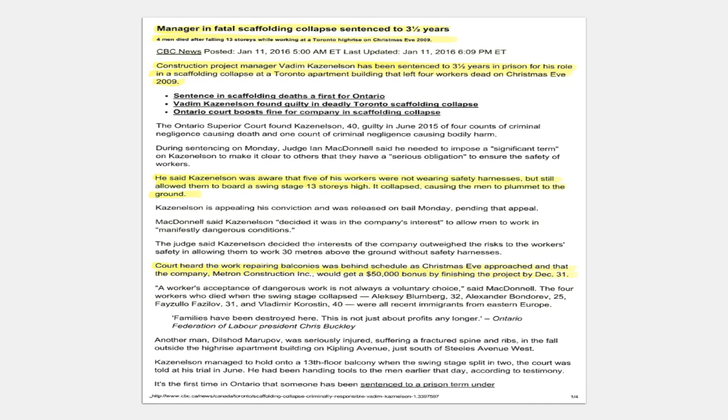OH&S ticketable provisions: the government searched the OH&S code to identify simple, observable, and clearly prescriptive violations that could be converted into ticketable offenses. It came up with 66 of them, to be charged against both employers and workers. Tickets impose an immediate $100 to $500 stipulated penalty. Worker tickets range from $100 to $200, while employer fines range from $300 to $500. In many cases, both the employer and worker can be ticketed for essentially the same offense. If a ticket is issued only to a worker, the officer will give a contact report to the employer.

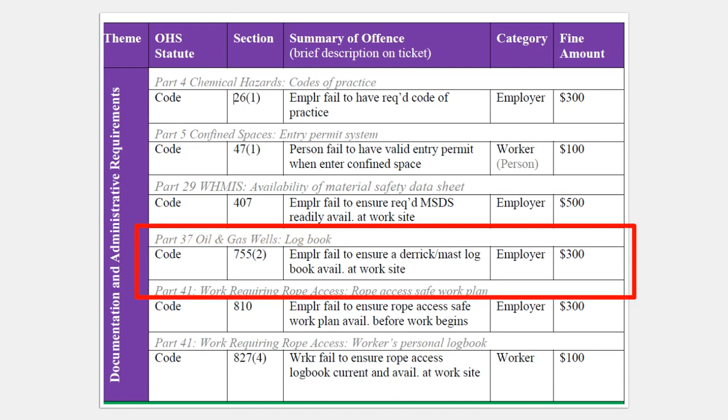Employers failing to ensure rope access safe work plan is available before work begins will incur a $300 fine. Workers failing to ensure rope access logbook is current and available at the worksite will incur a $100 fine. Employers failing to ensure workers are using or wearing the required equipment will incur a $500 fine. Employers failing to ensure workers exposed to traffic are wearing the required visible clothing will incur a $500 fine. Workers failing to wear the required visible clothing when exposed to traffic will incur a $200 fine.

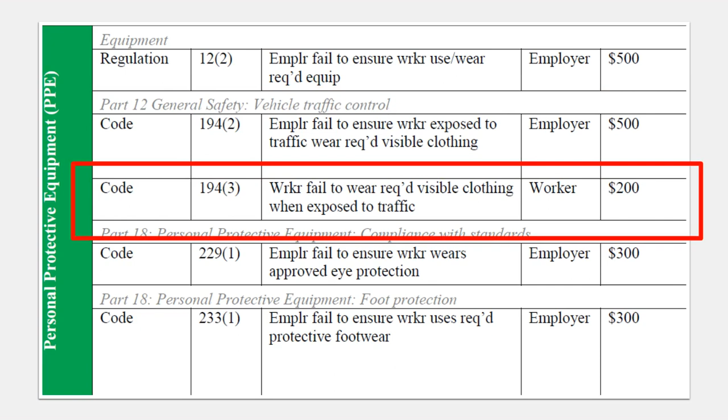Employers failing to ensure workers are wearing approved eye protection will incur a $300 fine. And employers failing to ensure workers are using the required protective footwear will incur a $300 fine.

Navigating the OH&S Codebook. There are 4 parts to the OH&S Codebook. Due diligence: this part outlines the legal duties under Alberta's OH&S Act, regulations, and code that are imposed on employers, workers, contractors, prime contractors, and suppliers. Act: this part outlines the obligations of employers, workers, prime contractors, and the Government Safety Council, for example, to have written health and safety policies, conduct regular inspections of the worksite, etc. This part also outlines the role of OH&S officers. Regulation.

This part outlines specific requirements for critical documents to be available, such as the OH&S codebook. This part discusses legal requirements of the employer for items such as maintaining equipment, providing safety training, ensuring workers are competent, etc. It also outlines the administrative penalties. Code: this part is the largest section of the legislation that identifies, in detail, the legislative requirements based on a specific topic, known as a part. For example, Part 2 Hazard Assessment, Elimination, and Control, or Part 32 Excavating and Tunneling.

I went to work for a natural gas company, in the pipeline department, and I really enjoyed that work. I enjoyed it because it was almost always outside, and there was a wide variety of things to do. One day I could be digging a ditch with a shovel, the next day pulling charts at a well, the next day welding. I liked that variety. September 20th, 1991.

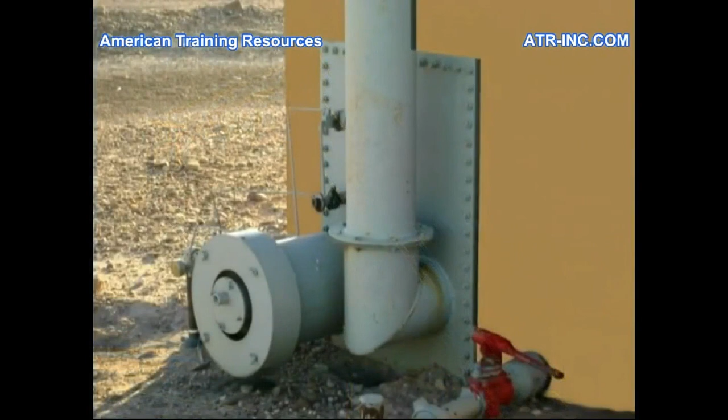I left with a senior welder Friday morning. We drove to the first location and finished our welding in that station right at break time, right at 10 o'clock in the morning. We were taking a break, and our company pumper came in. He said he had a well just right outside the location where we were. That well had 2 drip tanks on it. Both of those tanks had a pinhole leak in a weld that went around the fire tube. Could we put that on our schedule to fix sometime?

The welder I was working with that day, his name is Tracy. At that point, Tracy had worked with the company for 30 years. Tracy said, we'll just fix it today and not have to worry about putting it on a schedule. The pumper said, okay, I'm going to get hold of my supervisor and let him know what's going on. Because of a conflict between Tracy and that supervisor years earlier, and Tracy hadn't forgotten it, he said, no, you don't need to get hold of your supervisor. I'm going to do it today while I'm here, and we'll surprise him. We finished break. There was some other discussion that went on.

We drove over to the well just right outside the station where we were, and I got the gas monitor out and checked the atmosphere around where we were going to be welding, and it was safe. And I asked Tracy, what's going to keep a spark from getting inside one of those drip tanks? He said the pumper had told him what the liquid level was. It was several feet high. We're going to be welding 12 to 18 inches off the ground. If he happened to burn through the tank while he was welding, the liquid would snuff the fire out immediately. If he happened to go into the fire tube, it's made to have fire anyway, so we'll be okay.

What we didn't do was go to the truck, get our tape out, walk up the catwalk, open the hatch, and gauge the tanks to find out for sure what the liquid level was. We assumed that the information we'd been given was correct. It was not.

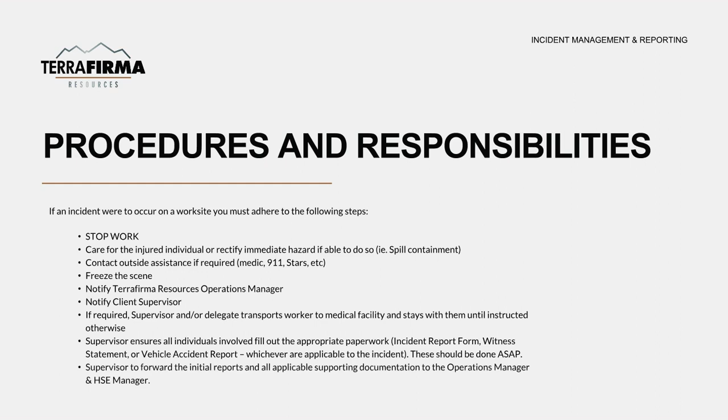OH&S reportable incidents. The incidents that are reportable to OH&S only by senior management are as follows: an injury that results in death; an injury or accident that results in a worker being in a hospital for more than 2 days; an unplanned or uncontrolled explosion, fire, or flood that causes a serious injury or that has the potential of causing serious injury.

The collapse or upset of a crane, derrick, or hoist, or the collapse or failure of any component of a building or structure necessary for the structural integrity of the building or structure. Corrective actions and preventable measures. The reason we investigate all incidents is to prevent future incidents.

The investigation process determines all of the indirect and direct causes of the incident, which allows for recommendations of corrective actions. Corrective actions must be completed in a reasonable time frame and must be communicated to all personnel.

In the next few slides, we will review an investigation example for a high-potential line strike incident at a worksite. The summary of events are as follows.

On March 23, 2015, a subcontracted HDD company was performing a 116-meter bore under 6 hotlines, a power line, and an access road. The crew successfully crossed the first hotline at a planned depth of 3.5 meters. As the drill bit approached the second set of hotlines, the depths were verified again at 3.5 meters. As the drill proceeded forward, the crew heard and smelled escaping gas.

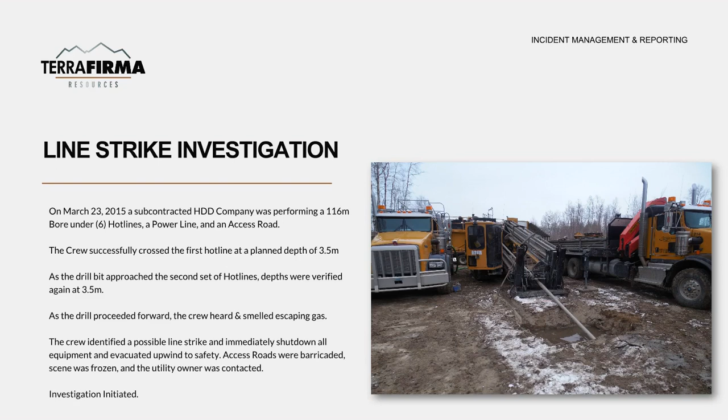Investigation initiated. Terra Firma Safety and Management arrived at the location to begin investigation. Statements were taken from all present at the time of the incident. The site was inspected, pictures were taken, sketches were drawn, and measurements were taken.

Documentation was reviewed and interviews of supervisors were performed. Post-incident drug and alcohol testing was performed.

Let's review the sequence of events. On March 13, Hydrovac daylighted the hotlines on bore number 36. On March 23, the HDD contractor met with the line representative and verified the depths of lines. The HDD contractor drafted the planned bore profile and reviewed it with the line representative.

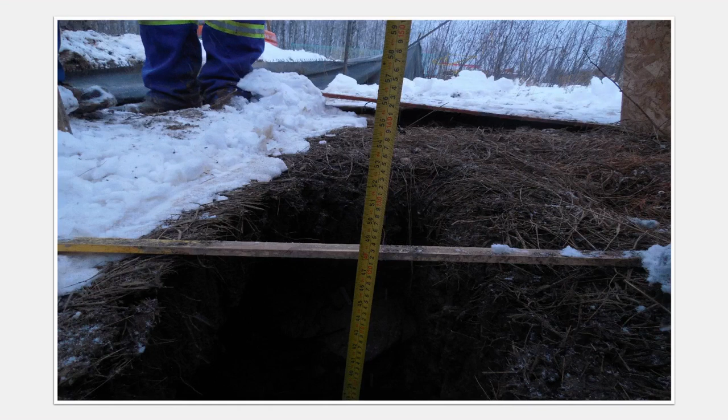Drilling commenced. The drill crossed under the first hotline and depths were verified. The drill approached the second set of hotlines and the depths were verified. The drill proceeded forward and the line was struck.

So what happened? Prior to beginning the drill, site hole number 1 was opened up using a hydrovac to expose the hotline. At a depth of 1.22 meters, the truck hit hard rock and workers were unable to obtain a visual on the hotline. They tried again, exposing site hole number 2 to 1.25 meters. Again, they hit hard rock and were unable to obtain a visual.

They tried a third time, opening up site hole number 3. With this site hole, they were able to fully expose both the 8-inch and 3-inch hotlines at a depth of 1.8 meters. The only difference was they had moved upstream on the hotlines to get away from the hard rock which was blocking their visual.

The problem, however, was that this site hole was not on the bore path. With the rock shelf hindering their ability to verify the exact depth of the line along the bore path, the workers inferred that the line was at the approximate depth of 1.8 meters found at site hole number 3.

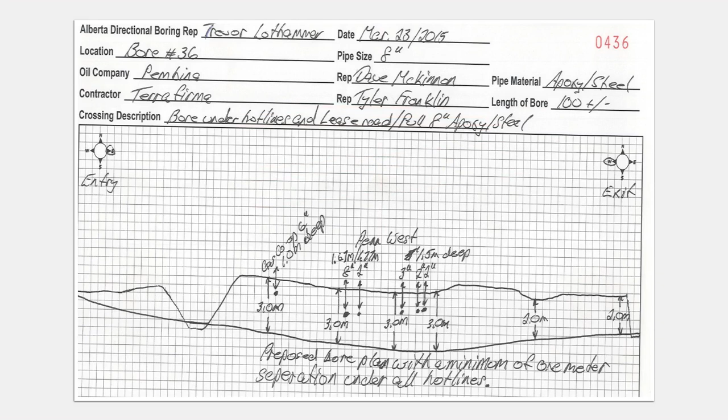They believed that 3 meters in depth for drilling would be safe. The line being drilled under was old, and workers didn't anticipate that a line would make such a dive in depth in such a short distance. But that is exactly what it did. Increasing from 1.8 meters in depth to 3 meters in depth in only 8 meters, the line was struck by the HDD drill.

Contributing causes were identified and corrective actions were created. These included failure to identify hazard or risk, failure to follow procedures, policies, and practices, failure to communicate, and inadequate preparation and planning.

Immediately, a safety stand-down occurred. A meeting was held to clarify roles and responsibilities related to HDD ground disturbance. A new explicit policy was developed, stating that all lines will be exposed and visually verified on the bore path. The client representative and line owner must also be present.

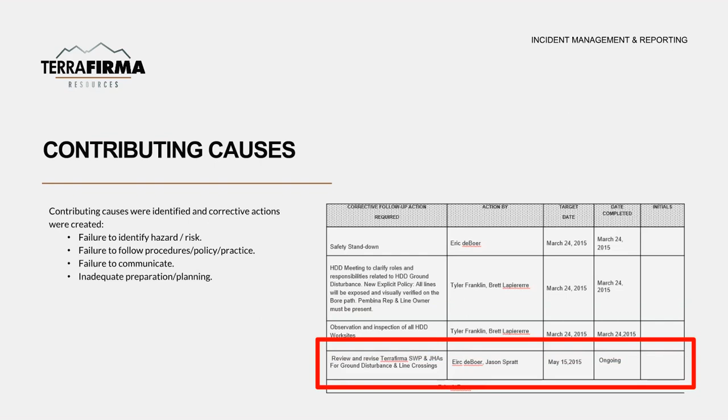Observation and inspection of all HDD worksites took place. Terra Firma reviewed and revised all safe work practices and job hazard assessments for both ground disturbance and line crossings. Emergency response plans: the company ERP includes all possible emergencies, consequences, required actions, written procedures, and the resources available.

This is available in the Safety Manual, Section 6, Emergency Preparedness. The site-specific ERP includes project information, including client, location, directions to site, muster area location, location of first aid, type of rescue required, and more.

It also includes contact information for client, supervisor, and emergency phone numbers such as the nearest hospital, and basic emergency response procedures. The site-specific ERP must be completed by the supervisor and a copy sent to the operations manager prior to the start of the project. Every vehicle on site must have a copy of the ERP in the driver's side sun visor.

Roles and responsibilities of supervisors during an emergency: the supervisor receives an emergency or incident call from a worker. He or she then initiates the applicable emergency response plan, contacts emergency services if required, reports to the client, then contacts the Terra Firma operations manager.

It is preferred if the supervisor and/or a delegate transports the worker to the medical facility and stays with them until instructed otherwise. The supervisor ensures all individuals involved fill out the appropriate paperwork, such as an incident report form, witness statement, or vehicle accident report. These should be done as soon as possible.

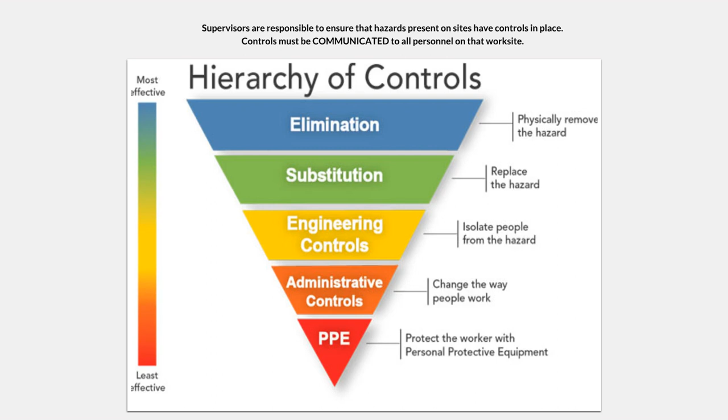The first and most effective control measure is elimination. If you can remove the hazard from the workplace, then this is by far the best method of hazard control. You can also substitute, meaning for example, replacing a hazardous chemical, work process, system, activity, or material with a less hazardous one. The next control level is engineering.

Some examples of engineering controls include the general design of the plant and the equipment, the installation of additional lighting to provide adequate illumination, and the use of instrumentation, automation, or other mechanical devices.

The next control is one that is used most extensively in the workplace. Administrative controls can include things like permits, authorization procedures, operating procedures, safe work practices, restricted areas, training, and more.

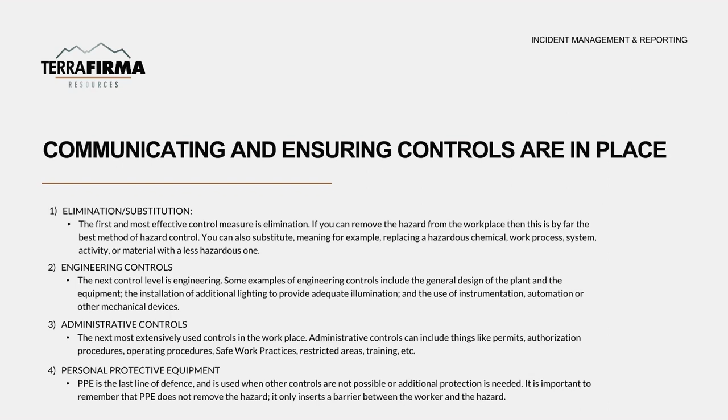PPE is the last line of defense, and is used when other controls are not possible or additional protection is needed. It is important to remember that PPE does not remove the hazard, it only inserts a barrier between the worker and the hazard. Process and responsibilities.

An inspection is an observational tour of the site and tools to check for compliance with regulations, safe work practices, safe job procedures, and safety rules. When completing an inspection, examine all aspects of the workplace, including people, physical conditions, environmental, equipment, materials being used, and actions taking place. Look for any potential hazards, existing hazards, or violations of safety rules, regulations, and/or code.

Any deficiencies observed during the site or tool inspections must have corrective actions. Corrective actions must be completed within a timely manner. Corrective actions must be communicated to personnel through morning tailgate meetings or monthly safety meetings. Supervisors are required to complete at least one documented worksite inspection per week or per job.

Driving is the most dangerous part of the job. When driving, always assess the hazards on a daily basis based on the conditions at the time. Drive to road conditions and be aware of wildlife.

Pre-trip inspections are to be completed for all vehicles and equipment prior to starting any work. Pre-trips must be handed in at the end of the week to your supervisor. Any defects on the pre-trips need to be corrected, preferably by the mechanic within a timely manner. Corrected defects must be recorded on a work order and attached to the pre-trip.

There are two types of defects for commercial vehicles. Minor defects: the driver is allowed to operate the vehicle or trailer with minor defects present, but all defects must be repaired prior to the next required trip inspection or trip's end. That is why the trip inspection report now requires the location of the inspection and the time of the inspection to be recorded. Major defects.

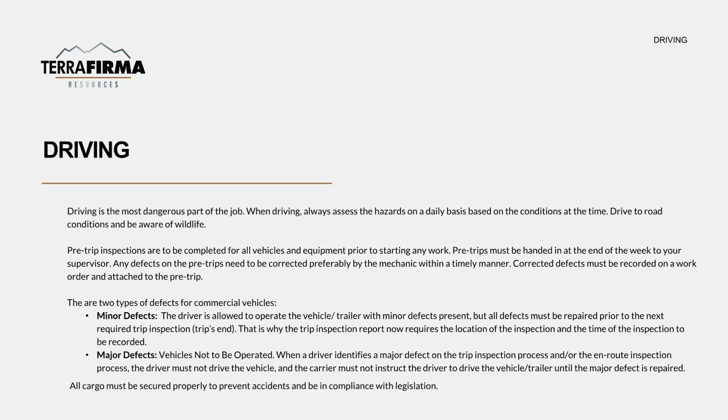It seems straightforward enough, fastening a load of equipment down securely. Just throw on a few straps or a couple of chains and away you go. Unfortunately, a piece of poorly fastened equipment, chunk of ice or clay, or weak chain or strap can result in your worst nightmare.

Whether large loads or small, as the operator, you need to make sure what you're hauling is secured correctly. It's the law, and the fines for sloppy or incorrect securement can be a shocker.

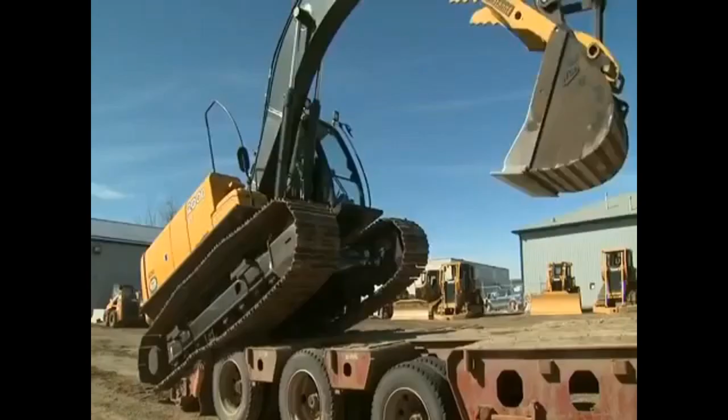The buck always stops here with you, the operator. On the road, you're ultimately responsible for the lives and safety of the people around you. The vehicle you drive and the items you haul have the potential to cause injury, death, and destruction. The responsibility for making sure this doesn't happen cannot be taken lightly.

The list of items that need to be secured correctly is extensive. According to the North American Cargo Securement Standards, this includes all items that could leak, spill, blow off a vehicle, fall from a vehicle, fall through a vehicle, become dislodged from a vehicle, or shift upon or within the vehicle to such an extent that the vehicle's stability or maneuverability is adversely affected. In other words, everything you're hauling, whether it's in a van, a pickup, a trailer, or a flat deck, needs to be properly secured.

There are right and wrong ways of doing this. By following the correct procedures, you can fulfill your responsibility to make sure this load gets to its destination safely.

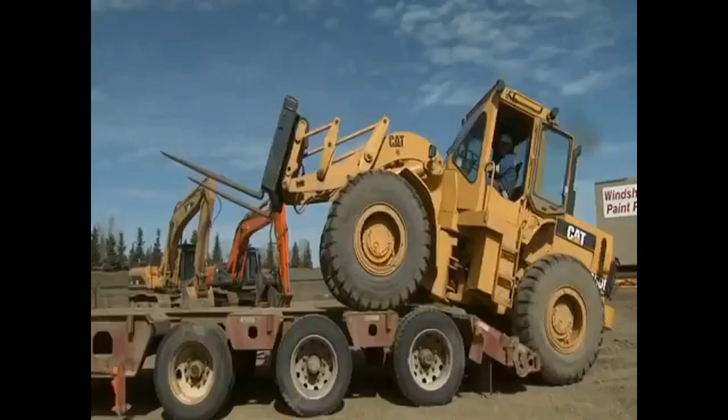In this program, we review safe loading and unloading and the proper tie-down procedures for transporting equipment and material, such as a person transporting garden equipment, loading a tracked skid steer, or a large rubber-tired front-end loader. The goal is to help you transport safely.

A piece of equipment tied down with a few ropes and secured with simple double knots to a truck, trailer, or deck is not a safe securement system.

All components of a safe securement system are specifically manufactured with rated capacities to withstand the pressure of the equipment and the items you're transporting. You must know the rated capacity of the truck or trailer, the rated capacity of the tie-down points on the truck or trailer, how and where to position the load on the trailer, the proper load tie-down points, and the rated capacity of the hardware, including chains, binders, and hooks.

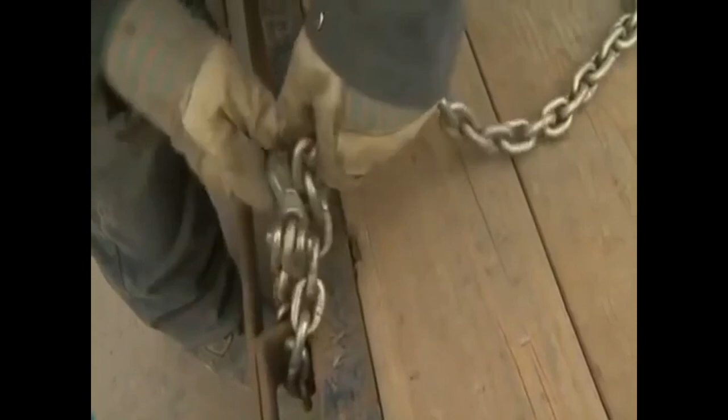Working together, these components make up a safe securement system.

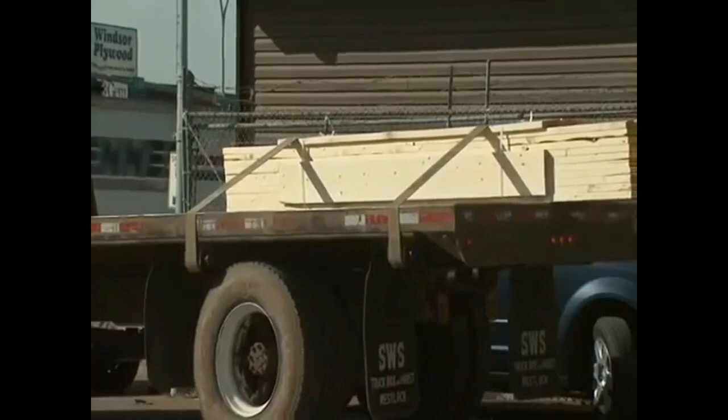Many operators don't realize that many different vehicles of all shapes and sizes can be considered transport vehicles. This includes everything from a truck tractor through to pickup trucks, regular trucks, enclosed vans, and even two- and four-wheeled sport utility vehicles. Any vehicle that's being used to transport cargo, whether it's a cat, an ATV, a load of lumber, or any one of thousands of things, is considered a transport vehicle.

Whatever you're using to transport, you need to know how much you can carry, your vehicle's rated capacity to haul equipment or goods safely. This is also called the gross vehicle weight, or GVW. The GVW of your vehicle is the total mass or weight when loaded. This includes the total of the load, the vehicle, fuel, passengers, and the weight of the trailer tongue. For some vehicles, the GVW can be the manufacturer's rating, or it might be what your vehicle is registered to handle. In other words, it's dangerous and definitely illegal to haul more than the vehicle or trailer can handle.

Trailers come in a wide variety of types, sizes, and shapes, each designed to safely haul a load. How safe they actually are depends on the trailer's capacity and the effort made to properly secure the items being transported.

Trailers should have manufacturer's tie-down points and structures built in to make securement easier and safer. These may include front-end structures, walls, floors, posts, and bulkheads, and such tie-down anchor points as D-rings. Regardless of the types of tie-down points or structures your trailer has, these must be able to hold the intended load and be of sufficient capacity to handle the road conditions that occur when the items are being transported.

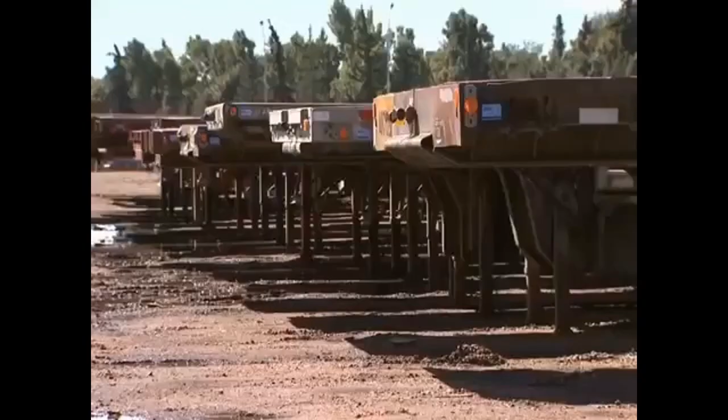The rated capacity of the tie-down points should be in the trailer operator's manual. If you don't know, it's up to you to contact the manufacturer and find out. All trailers have a manufacturer's rated capacity for the maximum weight they can safely carry under normal conditions. The rated capacity is generally recorded on a data information plate. The load on the trailer must not exceed the maximum weight shown.

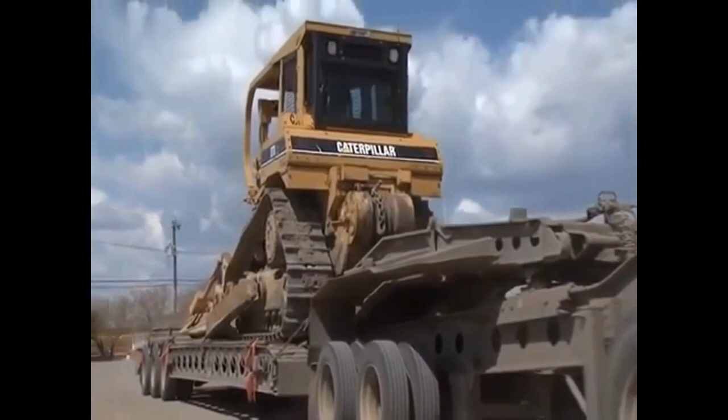Overloading a trailer creates stress on the deck and frame components, axles, wheels, spring suspension, and towing attachment points. Severe overloading also decreases braking efficiency and the steering control of the towing vehicle. The risks of overloading are compounded in severe weather conditions.

If you can't find the data information plate, check the manufacturer's operator's manual or contact the manufacturer to find out the rated capacity. It's obvious you need the right trailer for the right load. If it can't handle what you want it to handle, don't use it. The dangers are too great.

Okay, so you know your vehicle or trailer's GVW and you're certain it can handle the load you're carrying. Now it's time to do a walk around, a circle check. Walk around your vehicle and trailer to make sure everything's okay. Make sure you're well prepared before loading. Walk around the vehicle, trailer, and loading area and check out the following.

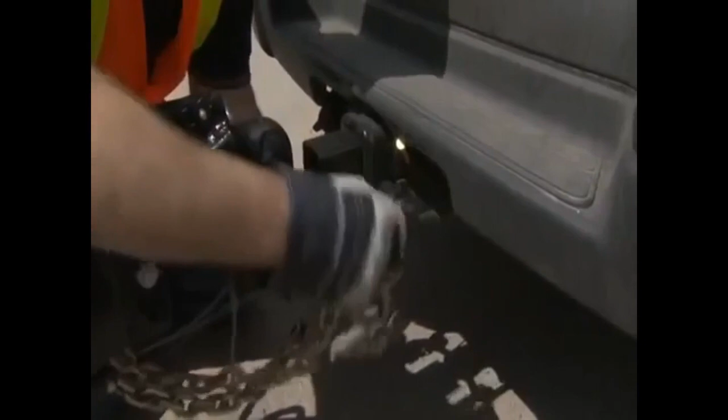Make sure low or flat tires and improperly working lights are repaired. Dangling hoses or wires are removed or secured. Make sure the trailer or transport vehicle is on good firm footing. If one side suddenly sinks into the ground while loading, this could spell sudden disaster. Anchor points, lock pins, panels, and doors are intact. The trailer hitch has the proper rating for the load, and the safety chain should have a working clevis lock. Check that your breakaway system is functioning.

Loose tools, timber, or equipment, loose panels, etc. are removed or secured. All mud, snow, and ice buildup in the loading area and on the trailer bed is removed. And finally, ensure there are no overhead wires or obstacles in the loading area that could be a potential hazard. Getting into the habit of taking a few extra precautions before loading is well worth the effort.

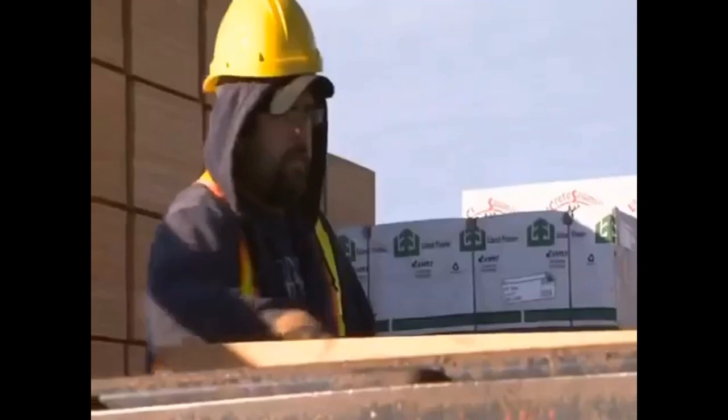The loading and unloading process really depends upon what your cargo is and what conditions you're working under. You need to adjust your strategy to fit the circumstances. Obviously, site conditions for loading and unloading vary. When outdoors, weather conditions can change within minutes. Slippery surfaces from snow or mud, along with reduced visibility in severe weather conditions, can dramatically increase safety hazards.

Weight and balance on the trailer must especially be considered before loading a piece of equipment like a backhoe. The weight of this machine and where it's parked on the trailer will affect handling, visibility, and overall safety during transport. Remember, the load on the trailer must not exceed the rated capacity. Guessing the load weight is not only risky, it's not smart. Overloading can cause stress on the transport vehicles and create major threats to safety. You must know the weight of the equipment you're loading.

The size and shape of the equipment and items you're loading and unloading may create maneuvering and visibility limitations that make loading and unloading a challenge. If you're not sure about how to safely load or unload a piece of equipment, ask someone who actually knows how to do this. It's not as easy as it appears, especially in bad weather conditions.

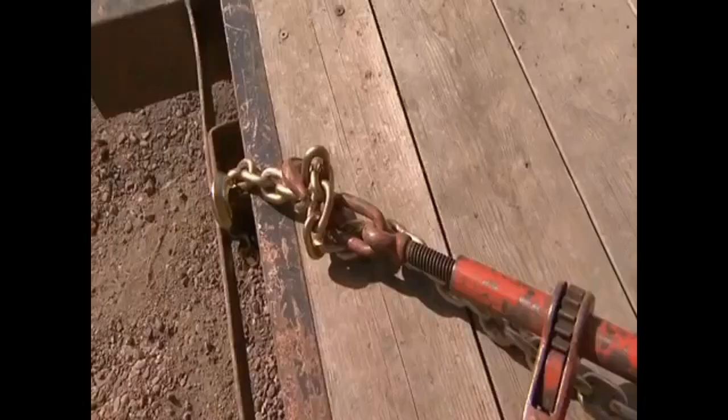Okay, you've placed your equipment or materials where they should be on the back of your truck or trailer, and you've double-checked your straps and chains. The next step is to make sure you secure this load correctly. For equipment, best practices suggest using at least 4 individual tie-down points to restrain the machine from moving in all directions. The tie-downs also need to consist of a combination of chains or wrappers, binders, and hooks, depending upon the weight of the machine.

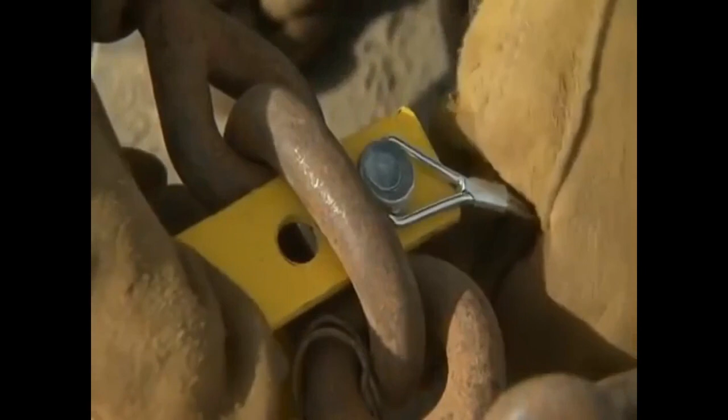For loads over 4,536 kilograms, 4 individual tie-down points are required. A direct tie-down is anchored to a direct tie-down point on the transport trailer and equipment at all 4 corners, pulling in 4 separate directions. This will prevent the load from moving forward and back, side to side, and up and down. Regulations also require each tie-down to be attached and secured in a manner that prevents it from becoming loose, unfastening, opening, or releasing while the vehicle is in transit.

Whatever you do, do not tie knots in chains to shorten them. Making or leaving a knot in a chain is creating a potential breaking point or a point where the chain can loosen.

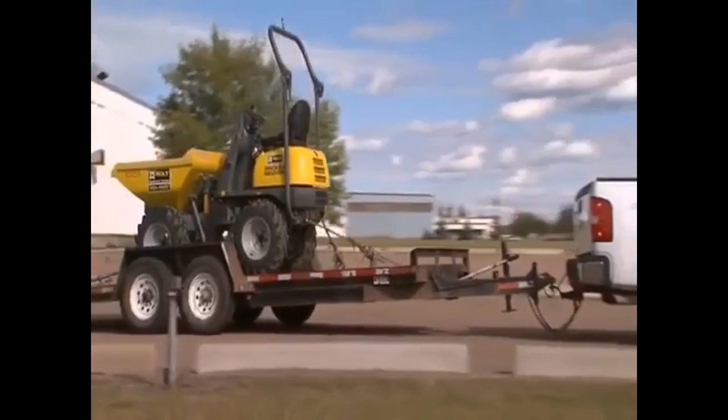Aggregate Working Load Limit, AWLL. The aggregate working load limit is the sum of the working load limits of each device used to secure an item on a vehicle. If there are 4 separate tie-down points, the AWLL is the rate of all 4 added together. The aggregate working load limit of any securement system must exceed 50% of the weight of the equipment being secured.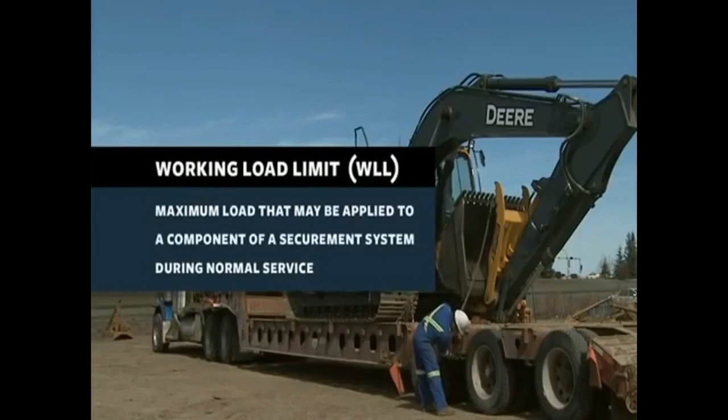In order to determine how well the components of your securement will work together, you must know each component's working load limit, or WLL for short. The working load limit is the maximum load that may be applied to a component of a securement system during normal service.

The working load limit for a tie-down is the lowest limit of any of its parts or the anchor points it's attached to, whichever is less. Every device contributes to the aggregate working load limit of the securement system. The component manufacturer usually assigns the WLL.

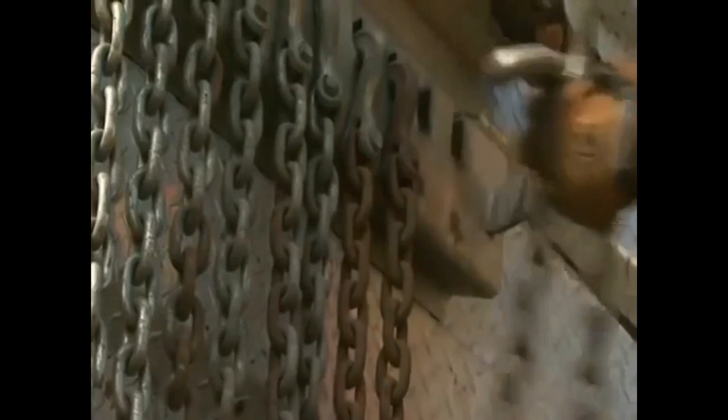A piece of grade 70 chain may be marked with a 70 or 700 in accordance with the standard of the National Association of Chain Manufacturers. The standard then gives the working load limit for that piece of chain, depending on its size. Carriers are recommended to use components that are rated and marked by their manufacturer. In that way, the carrier, driver, shipper, and inspector can all verify that the proper equipment is being used for the job.

In all cases, whether it's a box, piece of equipment, a snowmobile, or a load of lumber, your tie-downs must be able to maintain pressure downward in order to ensure the load you are transporting can withstand a minimum amount of force in any direction, forward, rearward, sideways, or upward in all driving conditions.

Some tie-downs are attached to the cargo and provide direct resistance to restrain the cargo from movement. Some tie-downs pass over or through the cargo, creating a downward force that increases the effect of friction between the cargo and the deck of the vehicle. This friction restrains the cargo.

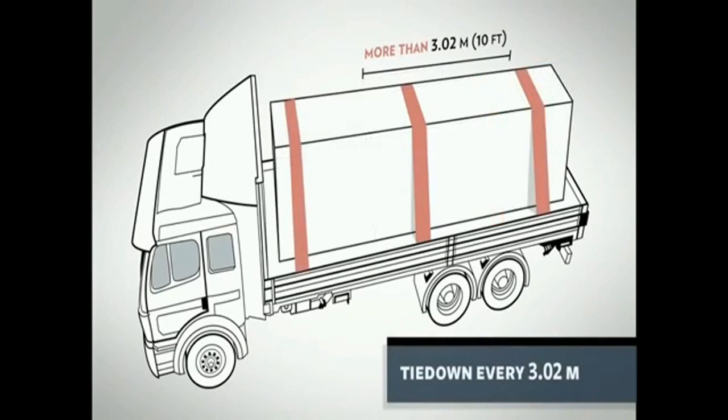The rule of thumb is to use one strap for any load that weighs up to 500 kilograms and is up to 1.52 meters in length. Anything over 500 kilograms and between 1.52 to 3.02 meters in length needs 2 straps. Anything longer than 3.02 meters requires a strap for every additional 3.02 meters.

You need to check the driver's handbook on cargo securement for the standards required for any specialty loads like prefab building materials, pipes, and culverts.

Chances are you use a trailer to transport your ATV, and that trailer is a small flatbed you tow behind your car or truck. The last thing that you or anyone wants is to have a four-wheeler come off a truck or trailer when you're driving down the road.

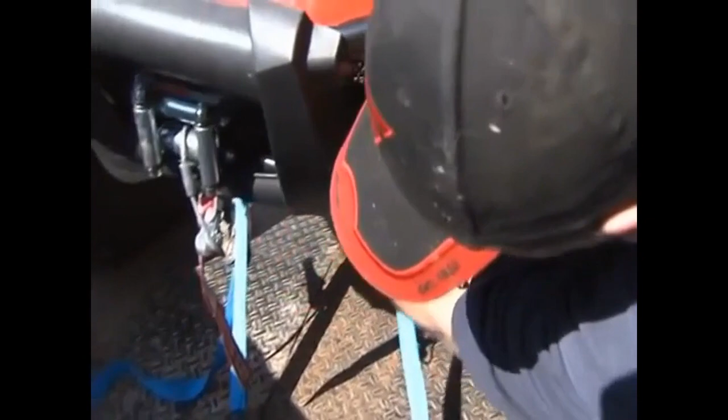When tying down an ATV, use at least 4 separate tie-down points, one for each side of the ATV. Most trailers have several hooks and areas to secure a strap, so look for the closest one and hook the strap in securely. Once all the straps are secured and tightened, take the excess strap and secure it so that it doesn't hang loose. This will prevent the excess from dangling below the trailer and possibly getting caught on something.

To test the tie-down job, slightly push the ATV in each direction. There should be no excess sliding of the ATV, and the trailer should move just as the ATV moves because they're securely fastened to one another.

It's doubly important to make sure individual pieces in a load don't slide out or come loose. You could be held liable if anything flies off the back of your trailer or truck.

And in case you're wondering, the cab shield or headache rack on a light truck or pickup is not considered part of a securement system. Don't be tempted to use this rather than the deck as the anchor for your tie-down. Most racks and vehicles like this are not secure enough to hold a heavy load.

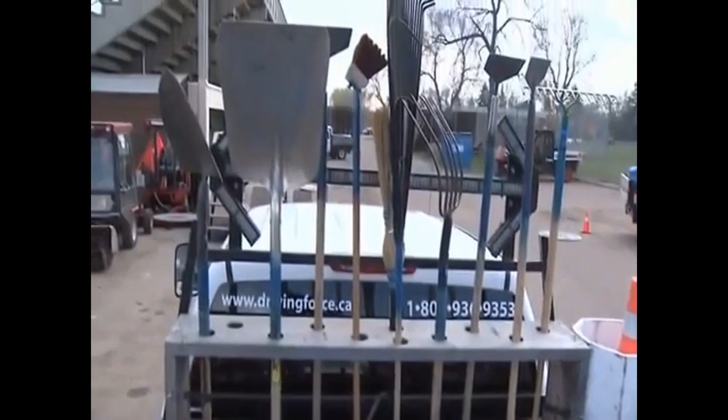Once the equipment is safely loaded and tied down, give it one final inspection, making sure that all legal warning devices are in place and that all your running lights are in proper working order.

Consider the impact of flying debris on other people on the road. Before you drive, check for debris like stones and dirt. Carefully check for other loose objects like tools, chains, binders, shovels, or pieces of wood on the trailer.

An item such as a hand shovel bouncing off your trailer at 60 kilometers an hour and hitting the windshield of a vehicle behind you can cause a fatal accident.

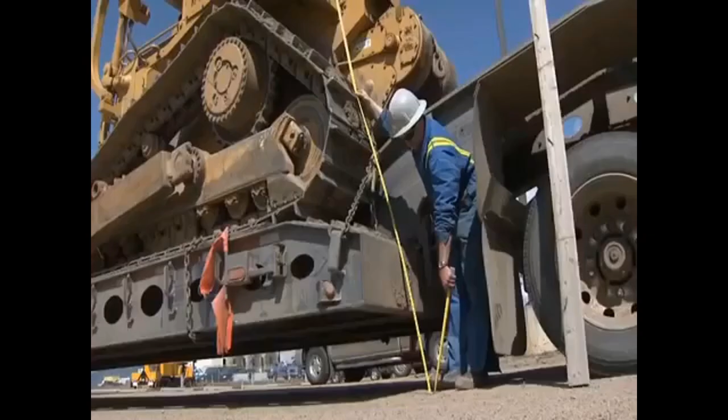And be doubly sure that your load isn't too high. The quickest way to check this is by using a good tape measure or a pole marked in meters. A few minutes checking the height of your load can save you hours of grief.

Now, once your load is secure, remember to buckle up and drive safely. No matter how secure this load is, reckless driving can dislodge it.

Stop periodically to inspect the load, trailer equipment, and securement devices. Regulations say drivers must perform minimum trip inspection requirements before driving, within the first 80 kilometers, and after 3 hours or 240 kilometers, whichever happens first.

If the machine has to be set off on or near a busy public roadway, special consideration has to be made for the passing traffic. Use traffic cones or other high visibility warning devices. When you stop, be sure to park in a safe, flat area. Shut off the vehicle and remove the key. Check that equipment and items have not shifted, that tie-downs are not damaged or weakened, and that they're not loosened or undone. Make the necessary adjustments.

Law enforcement will be the first to tell you that ignorance is not an excuse. Remember, all drivers have the shared responsibility to protect everyone on or near the road. As you've seen, load securement is not a matter of a few straps or ropes. Any load of any size is a potential hazard on the road. It's your responsibility to make sure this piece of equipment or load stays where it's supposed to stay. If you don't do your job it will bounce back to bite you, and hard. It doesn't take a lot of imagination to figure out what this machine, a load of plywood, or a flying rake can do to the vehicles behind.

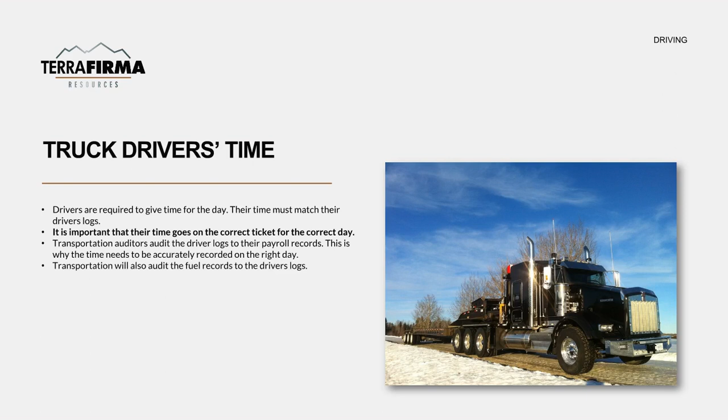Monthly safety meetings. Monthly safety meetings are to be held on the second Wednesday of the month. They are distributed to supervisors every month to review with their crews. Be sure to inform your inspector ahead of time.

Competencies and on-the-job training. Competency and on-the-job training is required by legislation. Competency assessments start from senior management and work down the organizational chart. Supervisors will be responsible to complete the competency and on-the-job training for their crews. Terra Firma utilizes competency assessment forms that serve as a checklist for the trainer to assess the worker.

QC training must be provided to all key personnel involved in QC activities. In this training we will review the requirements of a project's job file, in addition to important sections of the QC manual. This includes safety, scope, quality control, welders, NDE certifications, NDE interpretation reports, piping punch lists, examination checklist, non-conformance reports, records of calibration, pressure testing, line pipe, crossings, provincial QC, piping compliance plan, mill test reports, as-builts and weld mapping, landowner releases, change management, and bolt torque record.

A. Safety. Section A of the job file is dedicated to safety paperwork. It is here that you will place all documents related to safety on the job, including hazard assessments, safe work permits, ground disturbance permits, and more.

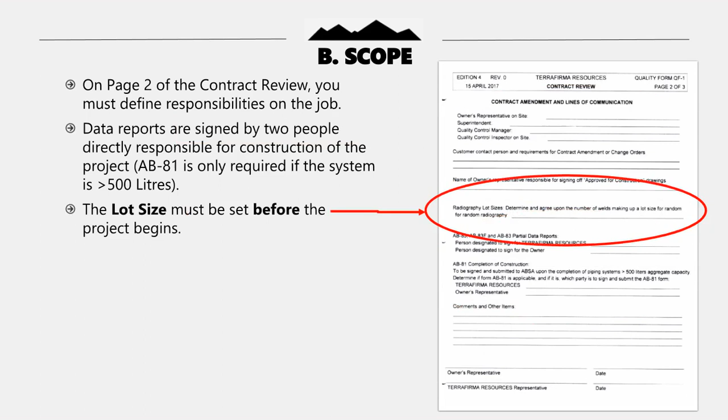What is a lot size? A lot is a predetermined scope within the project that will be completed and then examined to ensure there are no defects. A lot can be each day, each spool or drawing, a certain number of welds, or even the entire job. For example, Lot 1 is completed on this day as shown by the arrow.

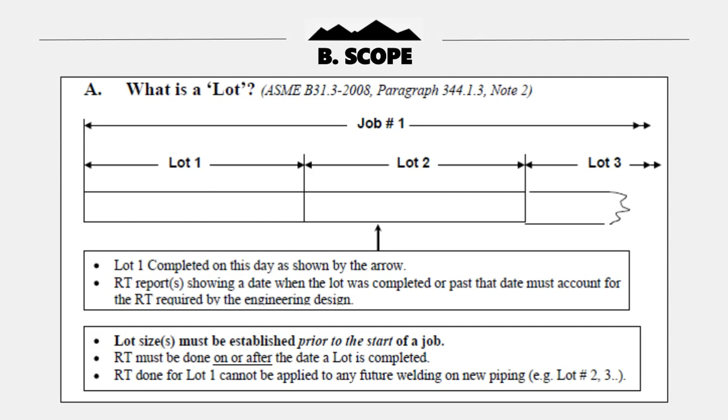The RT reports showing a date when the lot was completed, or past that date, must account for the RT required by the engineering design. Lot sizes must be established prior to the start of a job. RT must be done on or after the date a lot is completed. And RT done for Lot 1 cannot be applied to any future welding on new piping, for example lot number 2, 3, etc.

Another example: if a reject is found within the lot, then 2 tracers must be shot for the same welder within that lot. If there is a defect in one of those 2 tracers, then 2 more tracers must be shot within the lot. If there is a defect in any of those tracers, then the entire lot must be reshot. Another example, a weld defect is discovered by RT.

This means that 2 tracers are required of the same kind of welds, by the same welder, examined by the same RT method, and from the same lot. If the examination is acceptable, repair the defects found earlier and re-examine by the same method. If re-examination is acceptable, close the action.

If defects persist, 2 more tracer shots are required of the same kind of welds, by the same welder, examined by the same RT method, and from the same lot. If the examination is acceptable, repair the defects found earlier and re-examine by the same method. If re-examination is acceptable, close the action.

If defects persist, shoot or repair the entire lot. Repair all defects discovered so far or replace all parts of the lot which were welded by welders whose welds were radiographed above and progressively found defective up to this point. All repairs must be re-examined and pass subsequent RT.

It may seem easiest to choose the entire job as a lot, but this means that if you have 2 failed tracers, you must reshoot the entire job. This may be fine for small jobs, but for larger jobs, we may want to establish a smaller lot size. Lot size must be agreed upon between the supervisor and the inspector at the beginning of the job and recorded on the contract review form. If there is a failed weld, there must be clearly labeled tracer shots on the NDE report.

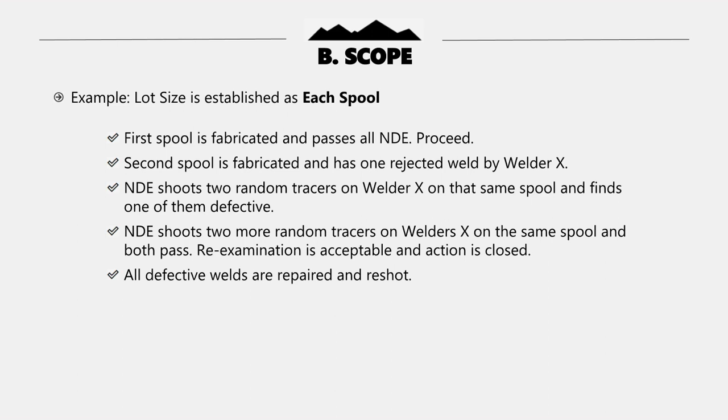Because of this, NDE shoots 2 random tracers on welder X on that same spool and finds one of them defective. Again, because of this, NDE shoots 2 more random tracers on welder X on the same spool and both pass. Re-examination is acceptable and action is closed. All defective welds are repaired and reshot.

For pipeline QC, this section also has the inspection and test plan. The main items that need to be specified in an inspection and test plan are the item that will be checked, inspected, or tested, and the technical document which contains the acceptance criteria. This criteria will determine whether the inspection is a pass or fail. All listed forms must be filled out and filed in the QC binder.

The type of inspection required, for both Terra Firma and the client, utilizes a series of codes: H, R, S, W, and not applicable. H stands for hold point. The party has to perform this check and it needs to be successful in order to proceed to the next stage of the construction.

R stands for review point. The party has only to review the record or document that the check has been done and it passed.

S stands for surveillance, general attendance at site. No signature required on the inspection request or its accompanying documentation.

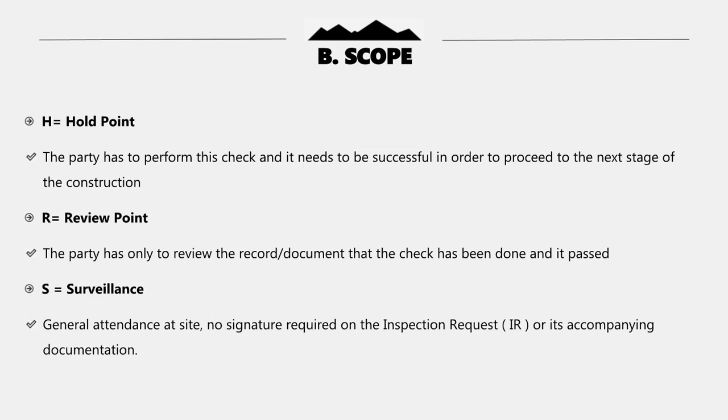W stands for witness point. The client has to be informed that a test is being performed, but its presence and signature is not obligatory to move on to the next stage.

NA stands for not applicable. No requirements for this particular activity.

The name of the representative for both terra firma and the client, as well as the date. This signifies that the people signing have performed the necessary inspection as outlined in the ITP. The ITP will be submitted to the client along with all relevant documentation as part of the QC package.

On page 3 of the contract review, you must check the copies of items requested by the client upon completion of the job. Please note that on all pages of the contract review, pages 1, 2, and 3, both the supervisor and the inspector must sign and date at the bottom.

C. Quality control. Section C of the job file is dedicated to general quality control information. There is nothing to fill out or sign in this section.

In this section, you will find terra firma's Certificate of Authorization Permit, Weld Procedures TFR-1N Rev 2, Weld Procedure TFR-PL2 Rev 2, Weld Procedure TFR-PL4 Rev 0.

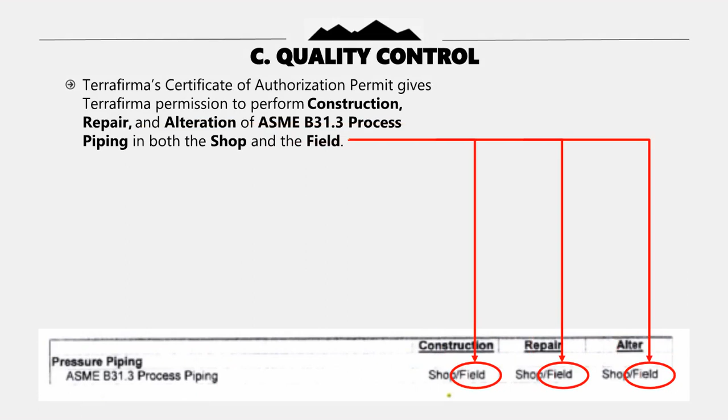Terra firma's Certificate of Authorization Permit gives terra firma permission to perform construction, repair, and alteration of ASME B31.3 process piping in both the shop and the field. Terra firma is not allowed to work outside this scope. This means that only pressure piping may be built, repaired, or altered.

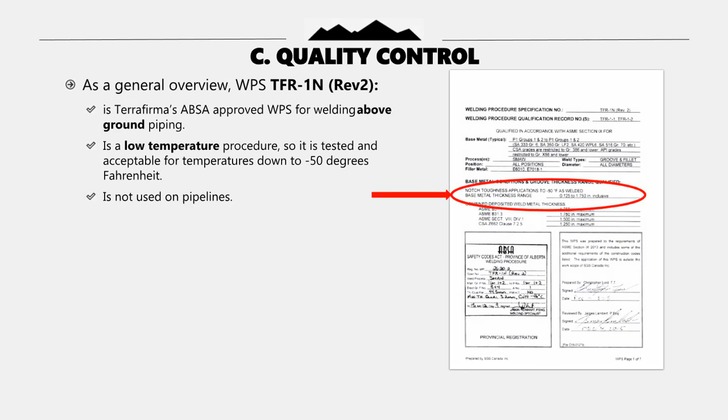No pressure vessels allowed. As a general overview, WPS TFR-1N Rev 2 is terra firma's ABSA-approved WPS for welding above-ground piping. It is a low-temperature procedure, tested and acceptable for temperatures down to -50 degrees Fahrenheit, and is not used on pipelines.

As a general overview, WPS TFR-PL2 Rev 2 is an underground procedure, as it is only notch toughness tested to -18 degrees Celsius, and is a pipeline procedure applicable to only 8-inch and higher in diameter with a wall thickness of 4.0 mm to 15.9 mm. As a general overview, WPS TFR-PL4 Rev 0 is an underground procedure, as it is only notch toughness tested to -30 degrees Celsius.

And is a pipeline procedure applicable to only 2-inch to 12-inch in diameter with a wall thickness of 1.5 mm to 7.2 mm. These overviews of the weld procedures are not exhaustive. Supervisors are expected to read and be familiar with every weld procedure so that they be used properly.

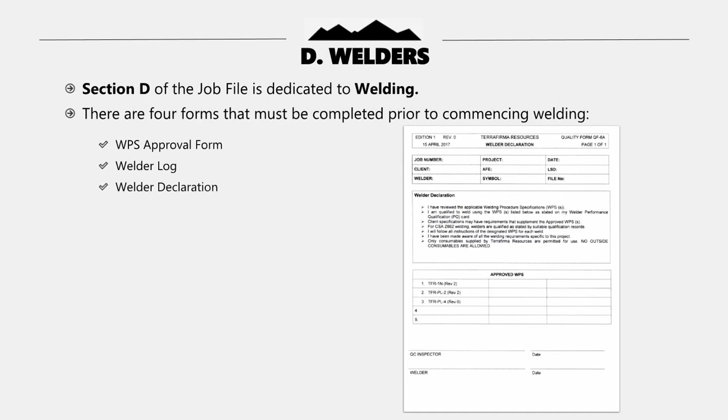D. Welders. Section D of the job file is dedicated to welding. There are 4 forms that must be completed prior to commencing welding: WPS approval form, welder log, welder declaration, and welder qualification summary.

The WPS approval form must include project information, nominal pipe size of all pipe, wall thickness of all pipe being used, material grade of all material being used, the client approved weld procedure. Put a check next to the approved procedure.

The welder log must include welder name, ABSA file number and symbol, process, welding procedure, P number, F number, position, maximum deposited weld metal thickness, minimum pipe diameter, and expiry date of performance qualification card.

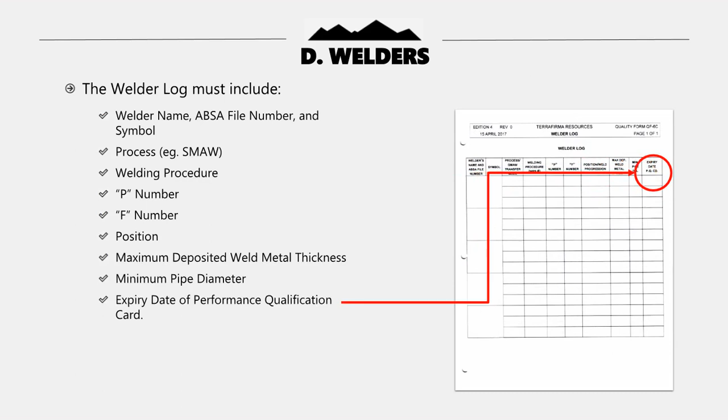This log must include every welder on the job. This information must be logged prior to any welding taking place. A copy of the welder's tickets must be included with this log. It is the supervisor's responsibility to include them and check that they are valid.

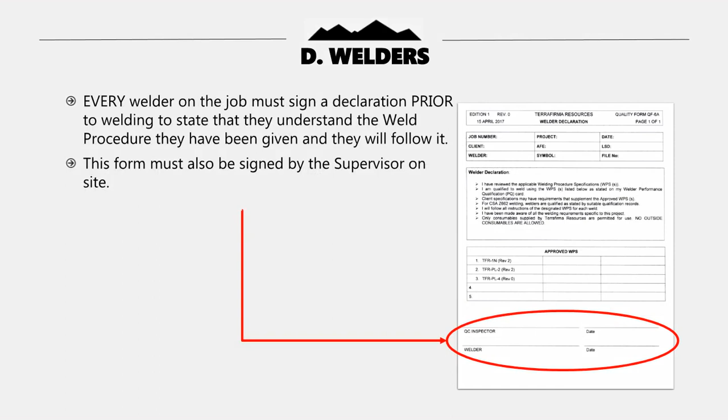Every welder on the job must sign a declaration prior to welding to state that they understand the weld procedure they have been given and they will follow it. This form must also be signed by the supervisor on site.

The welder qualification summary is to be filled out for each welder, stating all of their welding credentials and information. These forms accompany the copy of the welder performance qualification ticket that you copy and place in the job file.

Any welder working on our projects must not only have a performance qualification card valid to within 2 years, but they must also have welded within the past 6 months. Welders who have provably welded for Terrafirma Resources are acceptable. New welders must either provide proof from a previous employer, or they must be parameter tested and documented in the QC package. If in doubt, please contact the office.

NDE certification. Include CGSB and eye exams for all NDE technicians on your job. Include the CGSB and eye exam for the Level 3 technician for the NDE company as well.

For ASME B31.3, all NDE technicians must have an SNT certification. This is the American version of the CGSB. Technicians must be, at a minimum, a Level 2 in the method they are performing. Make sure that they are not expired. Also make sure their eye exams are less than 1 year old.

NDE interpretation reports. ASME B31.3 specifies that only companies with ABSA-approved certification are allowed to manage the NDE for a given project. That means that, while the client's representative typically hires the NDE company directly, it is the responsibility of Terrafirma to direct the NDE personnel and validate their results as being compliant.

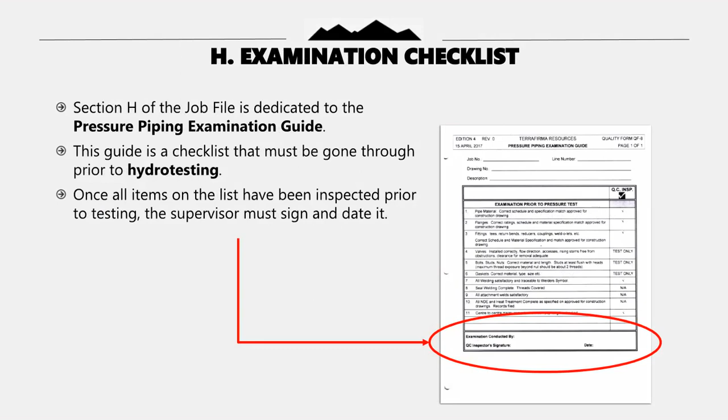Examination checklist. Section H of the job file is dedicated to the pressure piping examination guide. This guide is a checklist that must be gone through prior to hydrotesting. Once all items on the list have been inspected prior to testing, the supervisor must sign and date it.

Non-conformance reports. Non-conformance reports are not a negative thing and should be utilized as needed. They are an important tool used to identify potential problems or trends that can be rectified in one's own QC program. Properly identifying and tracking a non-conformance is the only way that a QC program can improve over time. If one arises, contact and submit to the office immediately so that we may ensure that it is properly rectified before proceeding.

Record of calibration. Section J is dedicated to calibration reports for hydrotesting instruments. All calibration records for pressure gauges and pressure and temperature recorders used for hydrotesting must be placed in this section. Note: as per section 4.1.4 of QP12 of the QC manual, for any test, either 2 calibrated pressure gauges must be used, or 1 calibrated gauge along with 1 pressure recorder can be used.

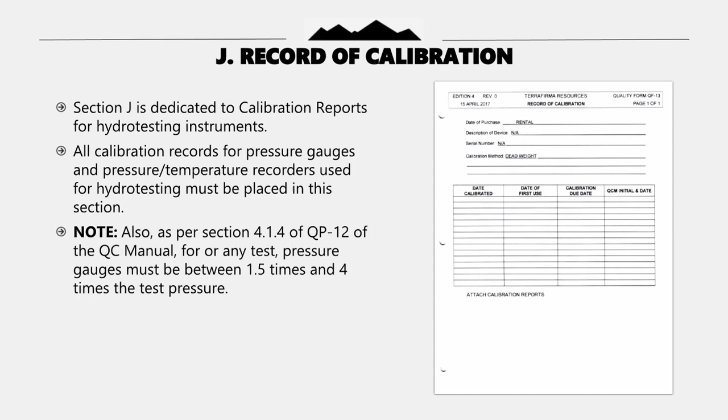Note: also as per section 4.1.4 of QP12 of the QC manual, for any test, pressure gauges must be between 1.5 times and 4 times the test pressure. For example, if a test is 100 psi, the gauge must be within 150 psi, or 1.5 times 100, and 400 psi, or 4 times 100.

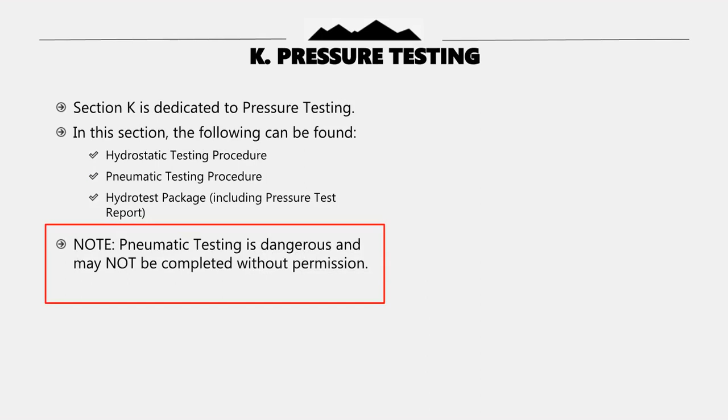K. Pressure testing. Section K is dedicated to pressure testing. In this section, the following can be found: hydrostatic testing procedure, pneumatic testing procedure, and hydrotest package, including pressure test report. Note: pneumatic testing is dangerous and may not be completed without permission. For every hydrotest on the job, fill out a unique hydrotest package.

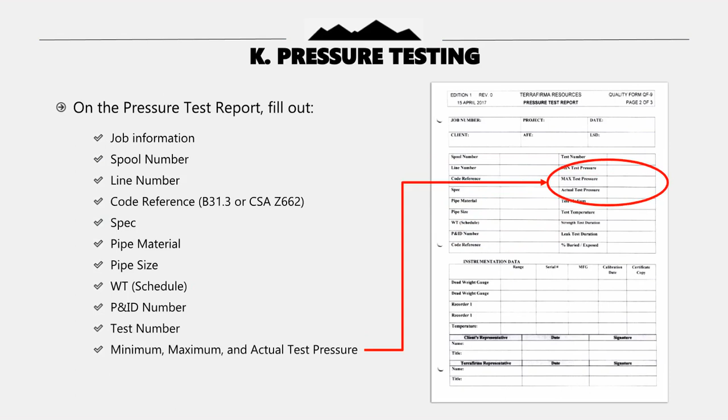Fill out the information on the cover, including job number, client, test number, date, LSD. On the pressure test report, fill out job information, spool number, line number, code reference, specification, pipe material, pipe size, wall thickness, P&ID number, test number, minimum, maximum, and actual test pressure, test medium, test temperature, strength test duration, leak test duration, percent buried versus percent exposed.

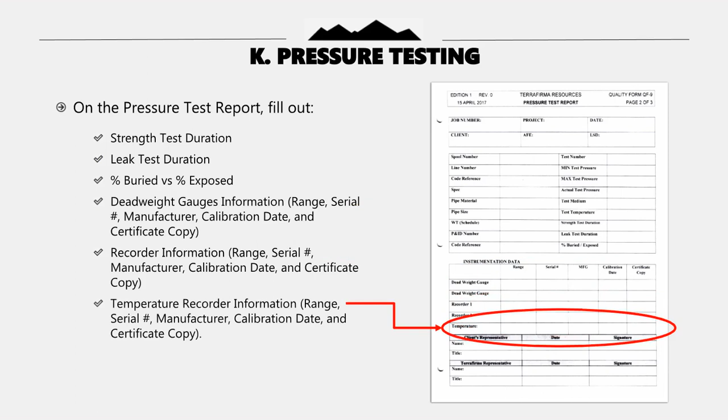Deadweight gauges information, including range, serial number, manufacturer, calibration date, and certificate copy. Recorder information, including range, serial number, manufacturer, calibration date, and certificate copy. Temperature recorder information, including range, serial number, manufacturer, calibration date, and certificate copy. Both the supervisor and the client inspector must sign the bottom. On the pressure report, record in intervals: time, pressure, ambient temperature, pipe wall temperature, ground temperature, if applicable.

All pressure testing charts must be placed in the job file with these documents and signed by the client representative and supervisor. All charts must have locations, times, and serial numbers for gauges recorded on them. Reference drawings being tested must be recorded on your pressure test report.

L. Line pipe. Section L of the job file is dedicated to line pipe. There are no forms to fill out or documents to sign in this section. Place pipe tallies in Section L for the delivery of pipe.

M. Crossing agreements. Section M of the job file is dedicated to crossing agreements. There are no forms to fill out or documents to sign in this section. Place all crossing agreements and reports, as well as any drill reports if applicable.

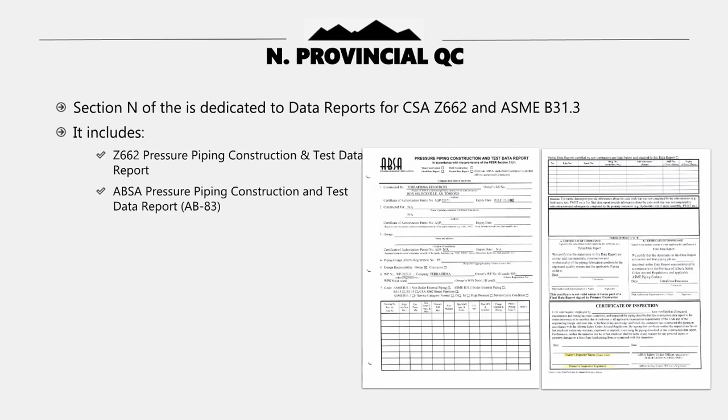N. Provincial QC. Section N is dedicated to data reports for CSA Z662 and ASME B31.3. It includes the Z662 Pressure Piping Construction and Test Data Report, the ABSA Pressure Piping Construction and Test Data Report AB83, and the ABSA Completion of Construction Declaration. For all scope that is CSA Z662, the Z662 Pressure Piping Construction and Test Data Report must be filled out.

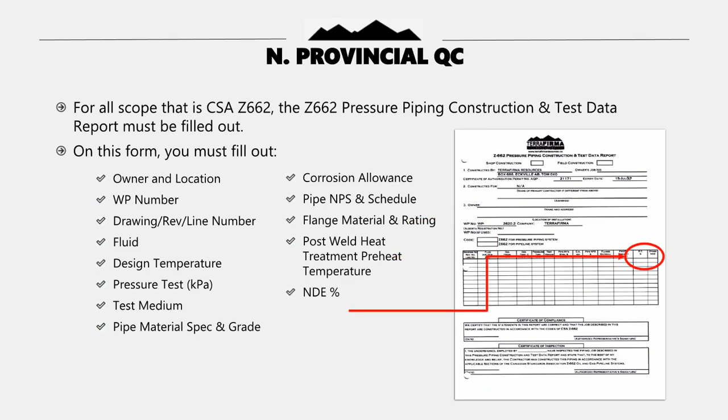On this form, you must fill out owner and location, WP number of weld procedure, drawing, revision, or line number, fluid, design temperature, pressure test pressure, test medium, pipe material specification and grade, corrosion allowance, pipe size and schedule, flange material and rating, post-weld heat treatment preheat temperature, and NDE percentage. Both the supervisor and inspector sign the bottom.

For all scope that is B31.3, the ABSA Pressure Piping Construction and Test Data Report must be filled out. On this form, you must fill out owner and location, WP number of weld procedure, drawing, revision, and line number, fluid, design temperature, pressure test pressure, test medium, pipe material specification and grade, corrosion allowance, pipe size and schedule, flange material and rating, post-weld heat treatment preheat temperature, and NDE percentage.

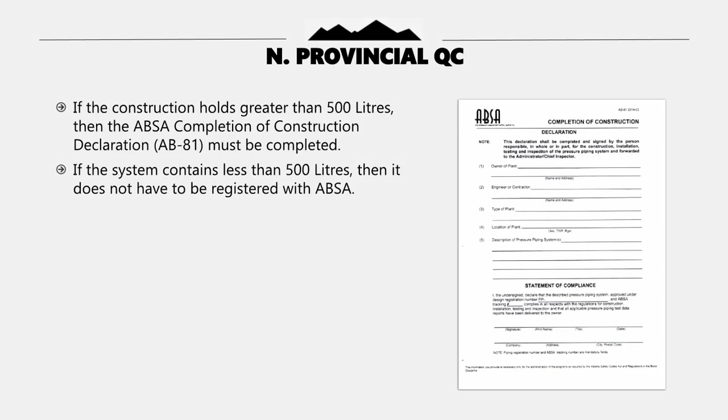The second page of this form must be signed by the TerraFirma representative responsible for the construction as well as the client inspector. If the construction holds greater than 500 liters, then the ABSA Completion of Construction Declaration, AB81, must be completed. If the system contains less than 500 liters, then it does not have to be registered with ABSA.

O. Piping Compliance Plan. Section O is dedicated to the Piping Compliance Plan. This document lists the activities involved throughout the project and must be signed and dated by both TerraFirma's supervisor as well as the client's inspector as each activity is completed.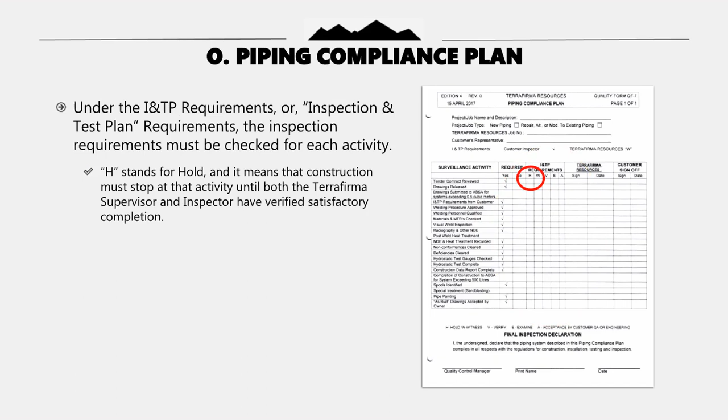H stands for Hold, and it means that construction must stop at that activity until both the Terra Firma supervisor and inspector have verified satisfactory completion. W stands for Witness, and it means that the activity must be witnessed by the client's inspector.

V stands for Verify, and it means the client's inspector must verify that the activity was completed. E stands for Examine, and it means that the client's inspector must examine the results of the activity. And A stands for Acceptance, and it means that the activity must be accepted by QA or engineering prior to continuing. By the end of the project, all of the activities will have signatures and dates beside them from both Terra Firma supervisor and client inspector.

P. Mill test reports. Material receiving is important for a comprehensive QC package and the first line of defense to spot defective fittings. Please ensure that the material receiving list is complete and matches both the MTRs and the as-built drawings. Always include all packing slips.

This makes it easy to locate missing MTRs, as the order number can be provided to the supplier. Heat numbers labeled on as-built drawings must be checked to make sure they are accurate and that the MTR is present and correct prior to construction. Heat numbers must match the material receiving list.

The supervisor must locate each MTR for every heat number on the as-built drawings. For each MTR, they must highlight the heat number on the MTR and initial and date the MTR. When reviewing these packages, it should be an easy and accurate process to locate the MTR for any given heat number on your as-built. Include supplier packing lists in the job file for additional traceability.

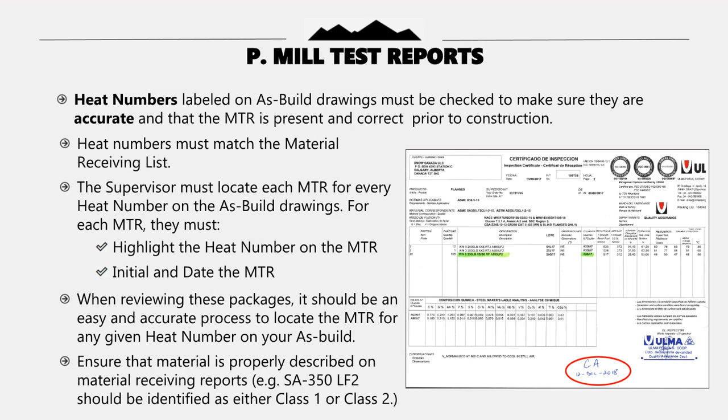Q. As-builds and weld mapping. Section 8.4.13.1 of the current QC manual lists all information that must be included on the spool sheets we develop. On the previous isometric paper, this information is included at the bottom of the page and on the right side under Design Parameters.

This section is important for staying in compliance with Terra Firma's QC manual and ABSA's requirements. This isometric paper is missing 3 requirements: fluid service category, temperature and holding time for post-weld heat treatment, and joint design details.

New Terra Firma isometric paper has been designed with the QC manual's requirements in mind. The intent is to include all requirements as per the manual, while making it simpler and easier to fill out by using blanks and checkboxes.

It contains all of the information required on our drawings as per our QC manual: material specification, grade, dimensions and schedule, type and rating; design pressure and maximum, minimum design temperature of system; code of construction including edition and for ASME B31.3 process piping and the fluid service category.

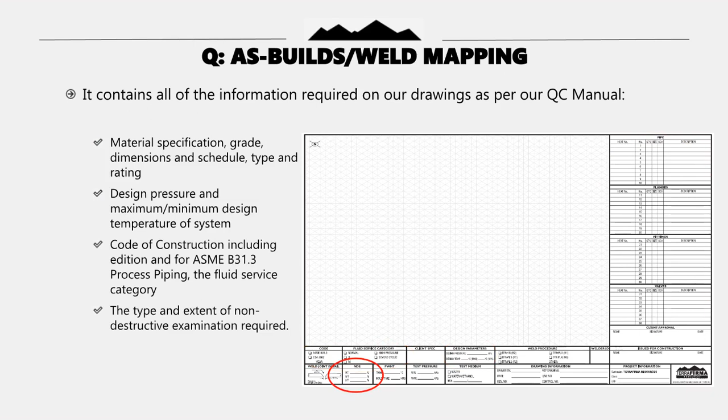The type and extent of non-destructive examination required. Preheat and post-weld heat treatment, temperature and holding time, if applicable. Test pressure and test medium. Construction, repair or alteration details, supports, etc. Welding procedure specification and joints details and dimensions. Joint design details, and any additional requirements.

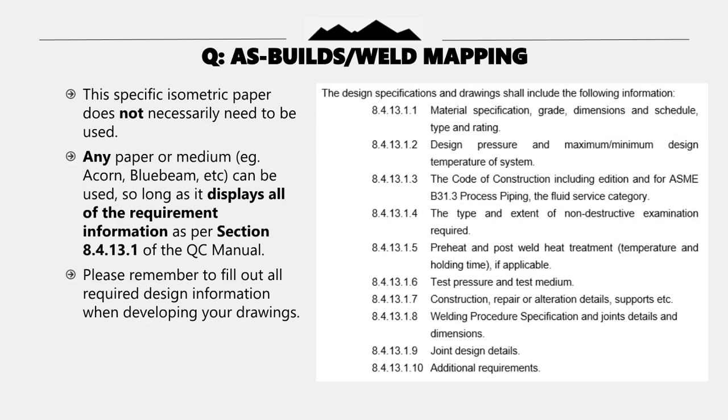Ensure that all spool drawings reference the owner-supplied engineered drawing under drawing information. This specific isometric paper does not necessarily need to be used. Any paper or medium, for example Acorn, Bluebeam, etc., can be used, so long as it displays all of the requirement information as per section 8.4.13.1 of the QC manual. Please remember to fill out all required design information when developing your drawings.

Another important addition are the issued for construction and client approval boxes. When no design drawings or spool drawings are supplied by the owner and the spool drawings are prepared by the contractor, documented approval shall be received from the owner to ensure that the design, material, fabrication, NDE, PWHT, hydrotest and any other requirements are correctly specified.

While the current method of obtaining drawing approval is through the piping compliance plan, ABSA has also recommended that clients could sign off approval on spool sheets that display all of the design information.

Additionally, all drawings must be issued for construction prior to release for construction. This is a form of document control that ensures that the proper, complete drawings are on the shop floor for construction. A spot has been included in the new isometric paper for the drawing to be issued for construction. Please sign and date the spool sheets when they are released for building.

The QC manual states that a drawing list must be maintained indicating the drawing title, number and revision, copies issued, and the name of the person to whom they were issued. This is a method of document control to ensure that all recipients have the latest and proper copy of the drawings issued. By tracking which drawings are released and to whom, we can recall and destroy them if there is a superseded copy.

These drawing lists are located in Section Q of the Quality Control Packages. Please fill these out to control drawings during construction.

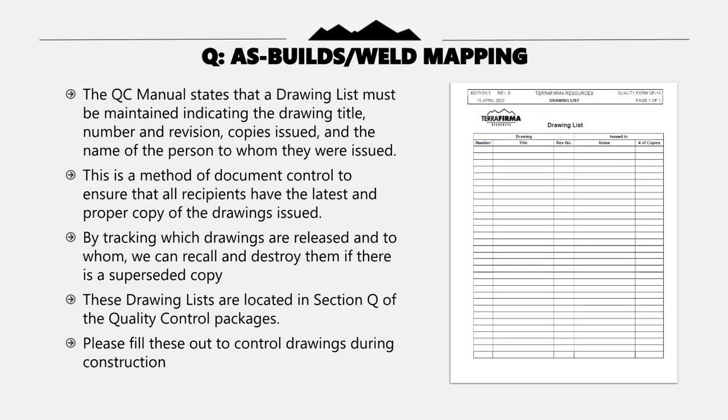Landowner releases: In Section R, there are no documents to fill out and sign. Place here any landowner release documentation if applicable.

Change management: Section S is dedicated to change management. In this section, the following can be found: scope for change management procedure, and the field change notification form. This form is to be completed if any changes to scope or specifications occur. Ensure to get the client's approval and signature prior to starting any changed work.

Section T is dedicated to bolt torquing. In this section, the following can be found: bolt tightening and torquing procedure, and bolt torque record and spool and flange unobstruction verification.

This procedure only applies upon client's specifications. In the bolt torque record, fill out the information on the bolt up taking place, including joint ID number, first pass, second pass, third and fourth pass. Both the Terra Firma supervisor and the client's inspector sign the document.

Now that we have reviewed each section of the job file, please ensure all signatures are completed prior to delivery to the office. This includes both the client and yourself. Obtaining signatures after the fact delays the turnover process.

Quality control manuals are controlled documents, issued to QC inspectors within the company, to be taken care of and returned upon issuance of the latest edition. The following controlled manual list shows who has which manuals.

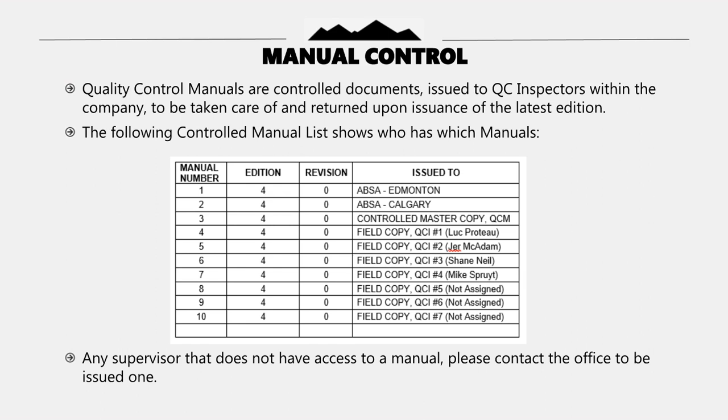On larger jobs, a dedicated quality control inspector may be assigned. For most jobs, however, the supervisor must perform the role of quality control inspector as well. All personnel performing quality control activities need to have an evaluation and training record filled out and signed by their supervisor. All supervisors must also be trained and have an evaluation and training record filled out and signed yearly.

Upon completion of this training, contact either the office or your immediate supervisor to receive your evaluation. Return all signed evaluations to the office.

As a final topic in this training, we will review how to perform weld parameters. It is the responsibility of the supervisor to ensure welding is being completed in accordance with the approved welding procedure. This must be accomplished by recording and checking the welder's parameters. In these slides we will review this procedure so that it can be effectively performed in the field.

Begin by preparing the multimeter. Insert the red test lead into the positive V terminal and the black test lead into the negative COM terminal. The colors will match up. Plug the red lead into the stinger welding cable and the black lead into the ground cable. Place the clamp around the stinger welding cable.

Before testing the first pass, record the preheat temperature of the pipe as well as the rod size. Rod size in Terra Firma's pipeline weld procedures are in metric. To determine a rod size from inches, simply use the following formula: rod size in inches multiplied by 25.4 equals rod size in millimeters.

For example, what is the metric rod size of 1/8 of an inch? 1 divided by 8 times 25.4 equals 3.2 millimeters. What is the metric rod size of 5/32 of an inch? 5 divided by 32 times 25.4 equals 4.0 millimeters.

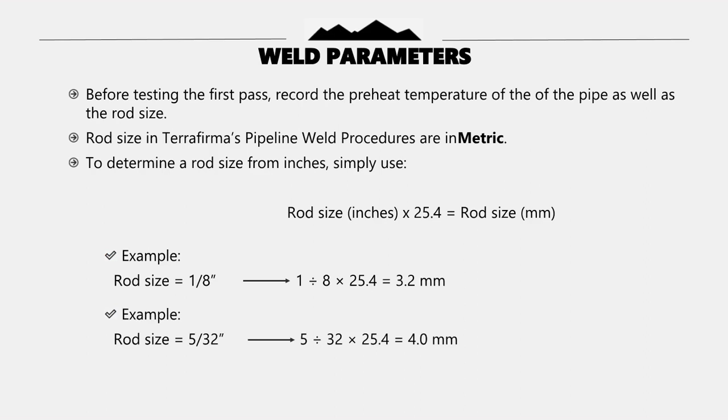To begin testing the first pass, start the timer when the welder begins. When the welder stops, stop the timer and record it. While the pipe is being welded, record as many different readings of voltage and amperage as you can.

To read voltage, turn the dial on the multimeter from off to V depending on the multimeter. Alternating current, represented by a squiggly line, and direct current, represented by a straight line, may be separate on the dial or may be combined. When recording weld parameters, we want to be on the direct current setting. If they are separate on the dial, select the V with the straight line. If they are combined on the dial, you can switch between the two typically by pressing the SEL button until the straight line is shown on screen.

Note: if you find the readings are displaying incorrectly, or MV is showing up instead of V, it is because your probes are not making proper contact with the stinger and/or grounding cables of the welding machine. Make sure they are properly inserted.

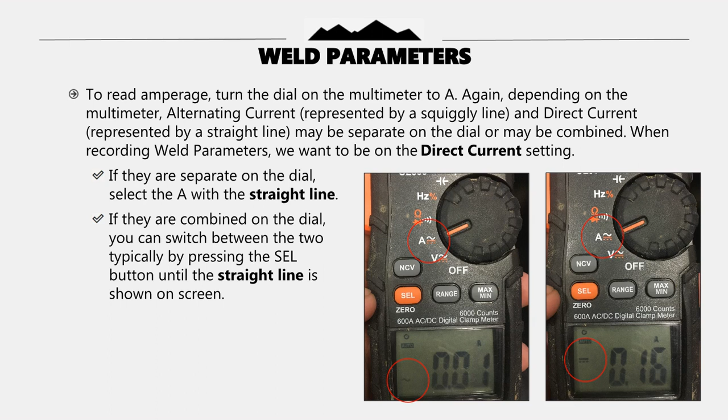To read amperage, turn the dial to A on the multimeter. Again, depending on the multimeter, alternating current, represented by a squiggly line, and direct current, represented by a straight line, may be separate on the dial or may be combined. When recording weld parameters, we want to be on the direct current setting. If they are separate on the dial, select the A with the straight line. If they are combined on the dial, you can switch between the two typically by pressing the SEL button until the straight line is shown on screen.

The time you recorded will most likely be in seconds. You must convert the time in seconds to time in minutes using the following formula: time in seconds, divided by 60, equals time in minutes.

For example, the time recorded for a pass is 45 seconds. 45 divided by 60 equals 0.75 minutes. Another example: the time recorded for a pass is 1 minute and 16 seconds, which is equivalent to 76 seconds. 76 divided by 60 equals 1.27 minutes.

Last example: the time recorded for a pass is 1 minute and 4 seconds, which is equivalent to 64 seconds. 64 divided by 60 equals 1.07 minutes.

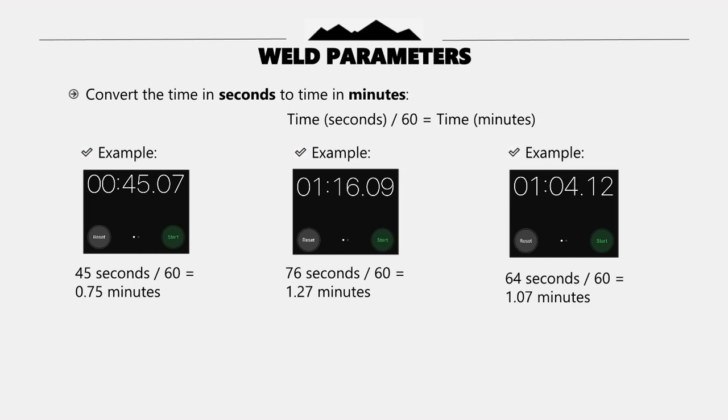Use a tape measure to record the length of the weld in millimeters. Determine the travel speed using the following formula: travel speed equals distance in millimeters, divided by time in minutes.

For example, the weld length is 300 millimeters and the time it took to weld was 0.75 minutes. What is the travel speed? 300 divided by 0.75 equals 400. The travel speed is 400 millimeters per minute.

Another example: the weld length is 340 millimeters and the time it took to weld was 1.27 minutes. What is the travel speed? 340 divided by 1.27 equals 268.

The travel speed is 268 millimeters per minute. Last example: the weld length is 290 millimeters and the time it took to weld was 1.07 minutes. What is the travel speed? 290 divided by 1.07 equals 271. The travel speed is 271 millimeters per minute.

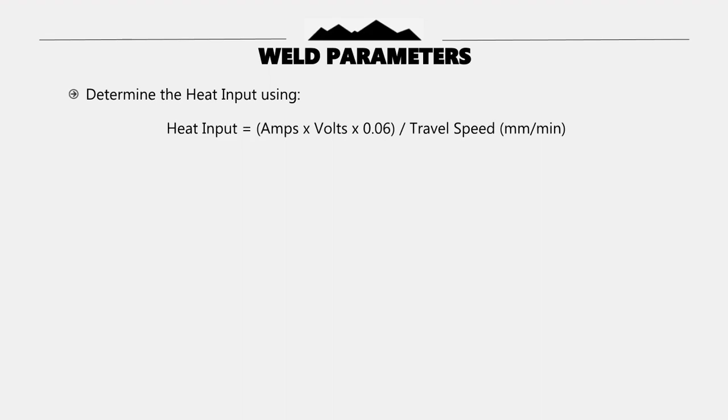Determine the heat input using the following formula. Heat input equals amps times volts times 0.06, divided by travel speed in millimeters per minute.

For example, the recorded amperage is 100 amps, the recorded voltage is 30 volts, and the travel speed was 300 millimeters per minute. What is the heat input? 100 times 30 times 0.06 divided by 300 equals 0.6. The heat input is 0.6 kilojoules per millimeter.

Another example: the recorded amperage is 120 amps, the recorded voltage is 26 volts, and the travel speed was 320 millimeters per minute. What is the heat input? 120 times 26 times 0.06 divided by 320 equals 0.59. The heat input is 0.59 kilojoules per millimeter.

Last example: the recorded amperage is 138 amps, the recorded voltage is 33 volts, and the travel speed was 400 mm per minute. What is the heat input? 138 times 33 times 0.06 divided by 400 equals 0.68. The heat input is 0.68 kilojoules per millimeter.

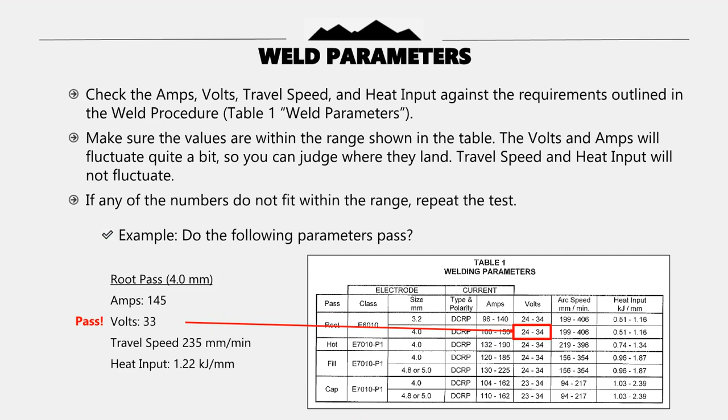Look under the volts column on the line next to root pass and 4.0 mm rod size. The range shown is 24 to 34. Since our reading of 33 falls within this range, it passes. Look under the arc speed column on the line next to root pass and 4.0 mm rod size. The range shown is 199 to 406. Since our travel speed of 235 mm per minute falls within this range, it passes.

Lastly, look under the heat input column on the line next to root pass and 4.0 mm rod size. The range shown is 0.51 to 1.16. Since our heat input of 1.22 kilojoules per millimeter falls outside this range, it does not pass. Even though the weld passed the amps, volts, and travel speed, it did not pass the heat input. Therefore the weld fails. Final exercise.

Perform the following calculation and determine if the welder passed on his or her root pass based on WPS TFRPL2. This is the root pass, and the rod size used is 5/32 of an inch. The range of amps were recorded with the average being 120, and the range of volts were recorded with the average being 30. It took 45 seconds to perform the pass, and in that time the welder traveled 290 millimeters. Did the welder pass?

Check your answers against the results in the following slide.

For the rod size, 5 divided by 32 times 25.4 equals 4.0 millimeters. For the minutes, 45 seconds divided by 60 equals 0.75 minutes. For the travel speed, 290 millimeters divided by 0.75 minutes equals 387 millimeters per minute. For the heat input, 120 amps times 30 volts times 0.06 divided by 387 millimeters per minute equals 0.58.

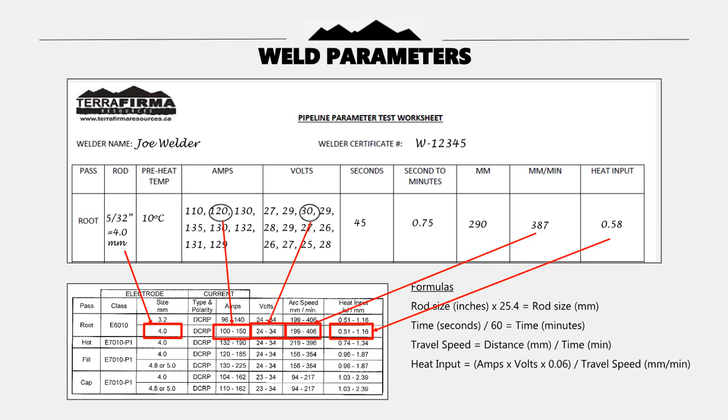Look in the line beside root and 4.0 mm rod size. 120 amps falls within the range of 100 to 150, so it passes. 30 volts falls within the range of 24 to 34, so it passes also. 387 millimeters per minute falls within the range of 199 to 406, so it also passed. Lastly, 0.58 kilojoules per millimeter falls within the range of 0.51 to 1.16, so it passes also.

So, did the welder pass based on these parameters? Yes, they did. You will need to complete this process again for the hot pass, fill, and cap to fully qualify the welder to the WPS being used.